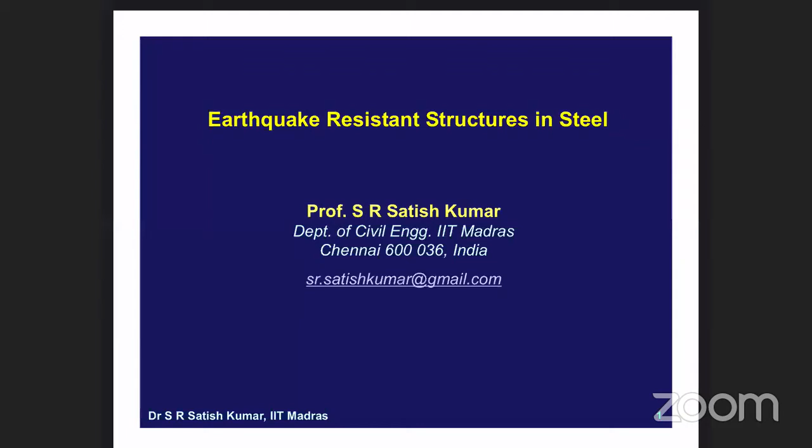Professor Satish Kumar, sir. Now you can start, sir. The presentation is already on the screen. Sir, I think audio is mute. You're not able to hear. I think sir is facing some problem with the iPad. Okay, now we can start, sir. Okay, sir, good morning. Thank you, sir.

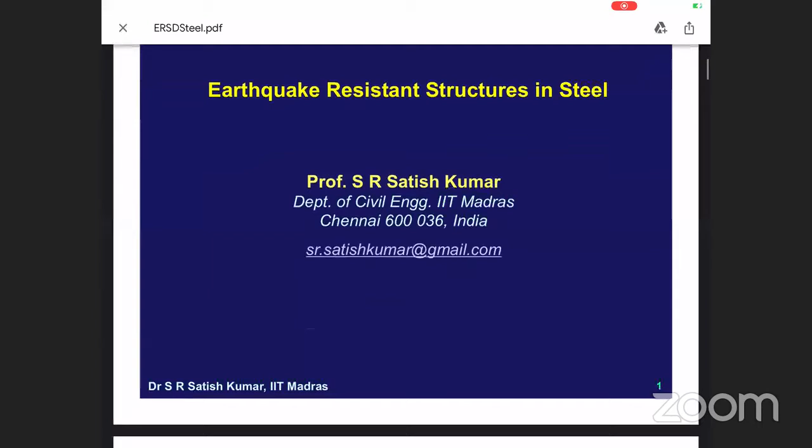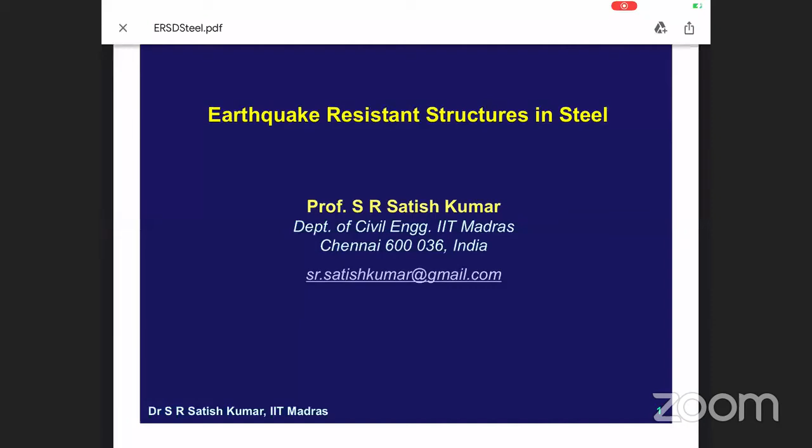So basically, we are going to look at earthquake resistant structures in steel today. I'll be talking about seismic analysis and design as applicable to design of steel structures. Some of these issues and topics have already been covered by other speakers, but I'll be touching upon the specific aspects related to steel. Then I'll look at design and detailing for earthquake loads as given in the provisions of IS 800 Section 12, which we can call the code for design and detailing of steel structures for earthquake loads. And then I'll give a quick overview of some special systems which are quite common in other countries, but have yet to take off in our country.

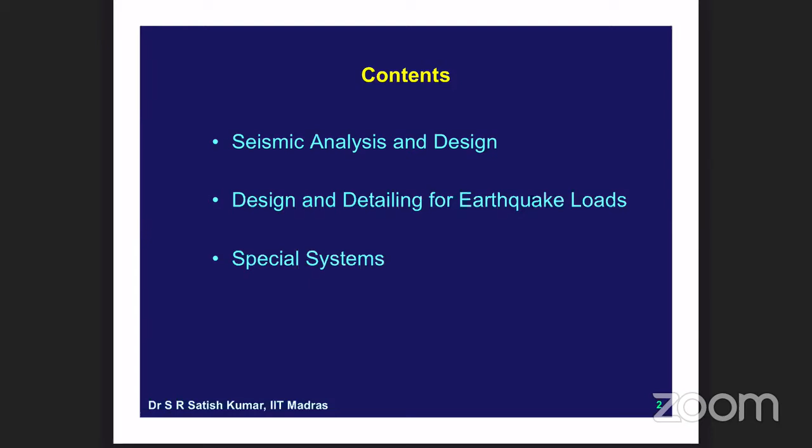So with that background, I'll go to the design philosophy. A variety of issues have been discussed about seismic design, like performance-based design having multiple performance objectives. But the basic core of seismic design is what is known as a dual strategy. There are only two performance objectives. One is to ensure elastic behavior under a moderate earthquake, and the other is to prevent collapse under a severe earthquake. As of now, we are not able to clearly meet even these objectives due to the various uncertainties in the demand and supply, both sides of the spectrum. This itself is a very big issue, and I'll explain how we try to do this. Basically, we estimate based on the probability of occurrence, etc., which Professor Raghukanth covered yesterday.

We estimate the design seismic load. That could be estimated as a ground motion, then converted into a response spectrum, from which we pick up the base shear and the distribution of base shear over the height using principles of structural dynamics. Based on these loads, we model the structure in software, apply these loads, and do what is called an elastic analysis, ensuring that the stresses don't go beyond the yield limit. So that is one level of analysis.

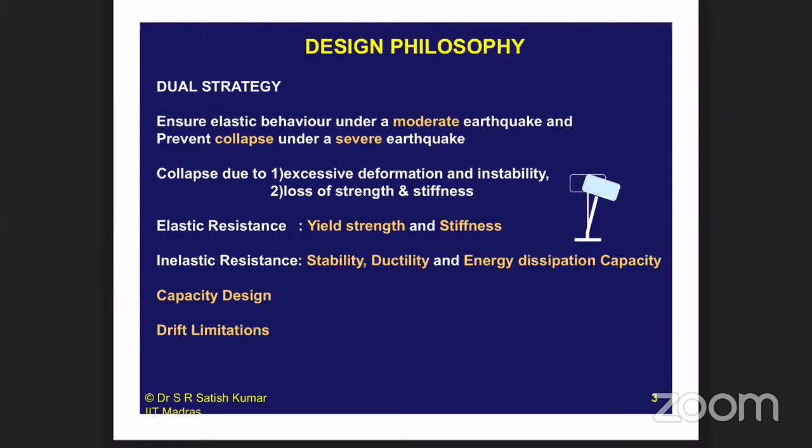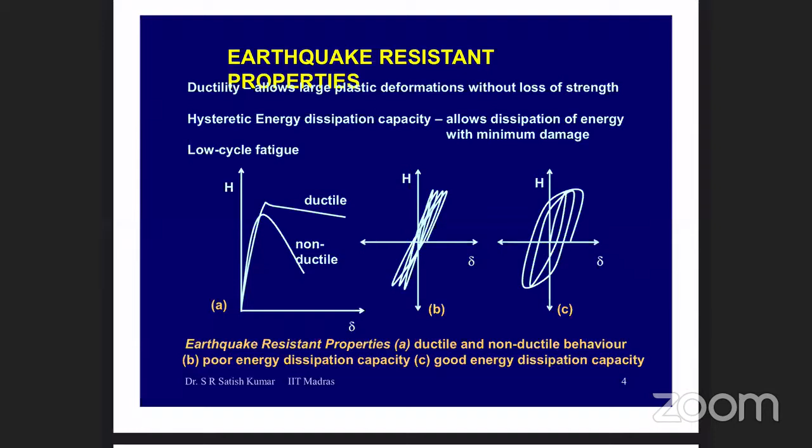We do have some drift limitations in the codes, to satisfy which we need to ensure adequate stiffness so that we are able to control the drift. These drift limitations help us control non-structural damage. Regarding the inelastic earthquake resistant properties, these have already been explained. Ductility is a property that allows large plastic deformations without significant loss of strength. There might be some loss of strength, but it should not be very significant. Similarly, hysteretic energy dissipation capacity allows energy dissipation without loss of strength and stiffness. These are the two properties that help us.

So what are the advantages of steel as a material for earthquake resistance or as a material of construction? By nature it is very ductile and consequently gives robust structures. That could be redistribution of stresses or redistribution of moments. Whenever one section of a steel member reaches its full plastic moment, it develops what is called a plastic hinge, and it continues to rotate until other sections of the member also reach their limit. That is redistribution of moments, and that gives robustness. Robustness is defined as the ability to survive or avoid collapse even under some degree of damage at certain locations.

The other advantage we have with steel is that it can withstand reversal of stresses. The stresses that it is able to take in tension and compression, that is, the stress-strain curve for steel in these two directions, are almost the same, unlike concrete, which is pretty much weak in tension, right?

So in fact, you should remember that in reinforced concrete also we do use lots of steel, right? So to achieve ductility and energy dissipation, etc. So that is another major advantage. So I don't need to probably design a section which has been designed for, let's say, sagging bending moment. It will be able to take considerable amount of hogging bending moment, or a member like a column which is under compression can take considerable amount of tension, right, without having any serious issues. So that is another advantage. It can dissipate considerable amount of energy under cyclic loading. So that gives enormous robustness to the structure.

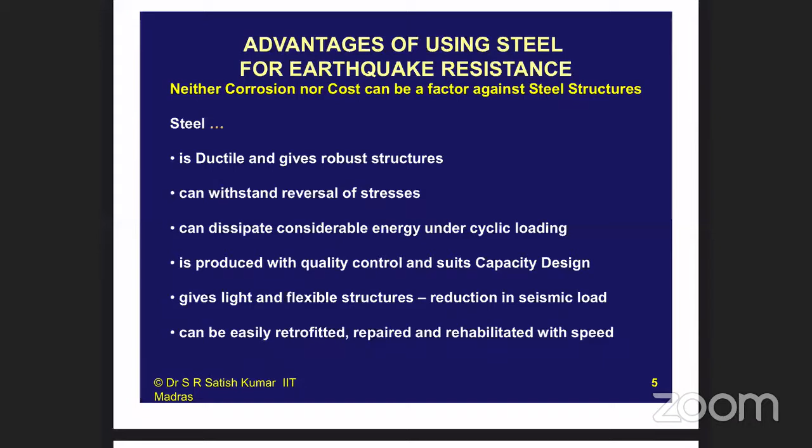So, steel also gives an advantage that it can be easily retrofitted, repaired, and rehabilitated with speed after an earthquake. If you find that a particular structure is deficient, you can always retrofit the structure to give it larger earthquake resistance, right? So those are the other advantages. On the whole, we find that steel structures do perform well.

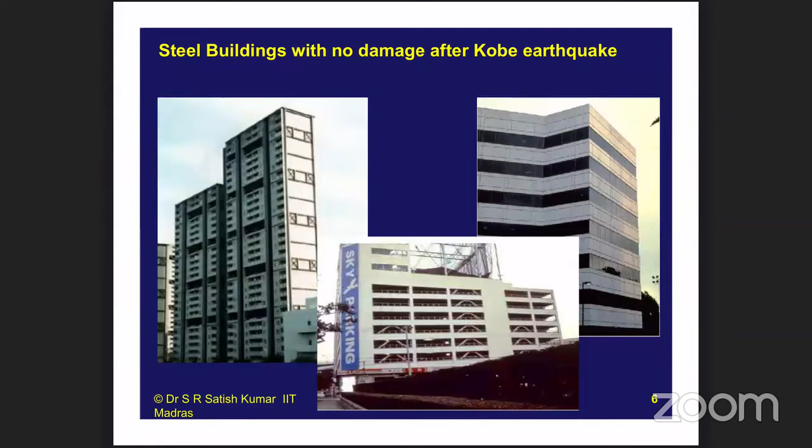These are photographs from the Kobe earthquake, showing a variety of structures with a variety of configurations. For example, the one on the left is a braced frame structure, which is very narrow, I would say. That is, its width is very low and it is very tall. The one below is a parking structure with inverted V-braced frames, and the one on the right is a moment frame. All these structures experienced an earthquake with a peak ground acceleration close to gravity G, and they had almost no damage. This is generally the case, but there are some cases where we have observed damage, and we are just trying to make sure those things do not occur again.

Okay, so now we are going to look at how we ensure adequate ductility and energy dissipation at various levels. We start at the material level, and we know that steel is a ductile material in general. But of course, as you increase the strength of steel, from 250 MPa to 500 MPa steel, it becomes a little more brittle. Codes like IS 1893 specify the kind of materials you can use in steel structural construction, and they specify two particular properties. One is the elongation percentage. That is, after you do a tensile test on a coupon and the coupon breaks, you check how much it has elongated. This elongation has to be at least 15–20% as per the material requirements. If you have that, then you can say your material is ductile.

The other important property, because earthquake loads are generally impact type loads, is this: when a material experiences a sudden impact, sometimes a ductile material breaks in a brittle manner. To guard against that, we do what is called an impact test, the Charpy V-notch test, which is the CVN that you see here. We ensure that the steel has adequate energy dissipation capacity, around 21 to 26 joules. If it has that, then again we can call it ductile. These two properties are related, in the sense that the more energy you dissipate or the more you work harden, the steel ductility would reduce. So we need to make sure that the steel has both elongation ductility as well as energy dissipation capacity.

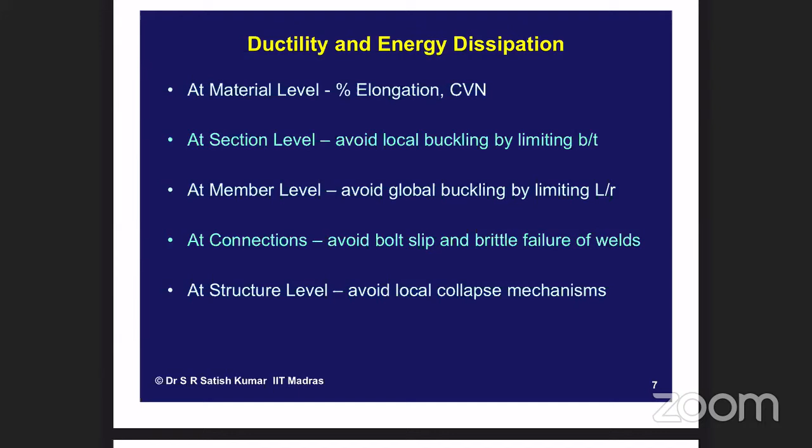So as a structure as a whole, we avoid basically what is known as the local collapse mechanism, which is like formation of hinges at the ends of a column in a particular story. So I'll show a slide for that. I'll just quickly go through what we have just looked at. That is, what is the percentage elongation for steel at the material level.

So here you see the bottom curve is, as you look, a stress strain curve for mild steel. And as you load, you reach the yield stress, you have a large yield plateau. There is some strain hardening, but then eventually it fails at a large strain value, right? So this yield plateau enables your material to be very ductile.

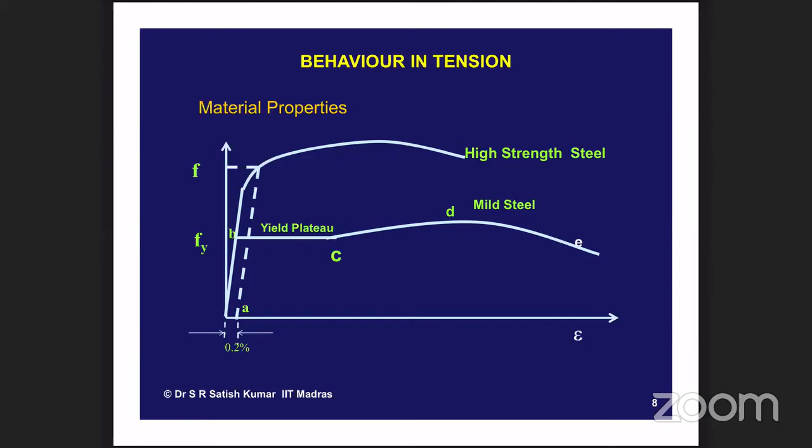Okay. Similarly, as I said, as you increase the strength, normally we wouldn't want to increase the strength of steel by work hardening or adding carbon, because that reduces the ductility and elongation. So generally how it is done, as all of you know in terms of reinforcement, is a thermomechanical treatment. So nowadays we get what are called TMT rebars for reinforcement. A similar treatment can be done for steel, and we can ensure higher strength and to some extent ductility. And we can also get ductility by adding some other microalloys like chromium, manganese, etc. So this also gives you higher strength without compromising on ductility.

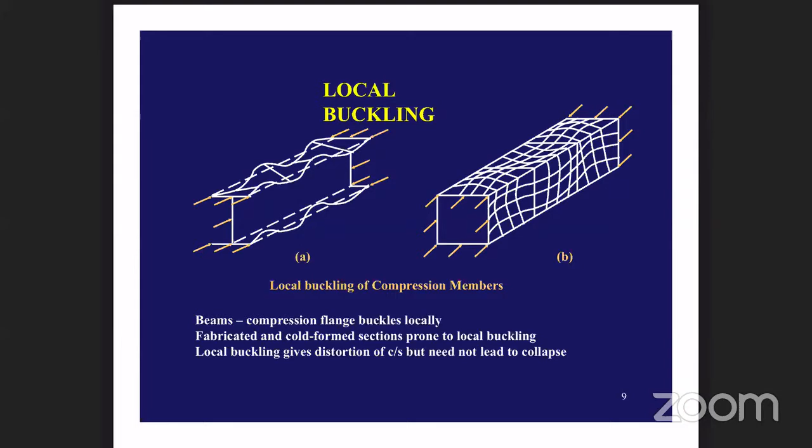Okay, and this slide shows exactly how local buckling in an I section or a box section happens. As you go on compressing, since it's a buckling, it will happen only when the stresses are compressive. And if you actually compress an I section with very thin flanges, you can see how the flanges become wavy, and that becomes local buckling, right? So that is how it happens. And the only way we can avoid this is by limiting the B by T values. Okay, so width to thickness ratio values.

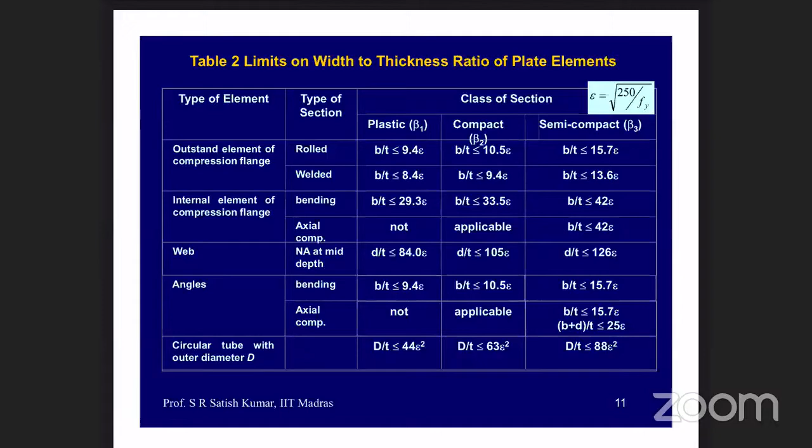Okay, so how to do this? It's very simple. You just calculate half the width of your flange divided by the thickness, and your B by T should be less than, for example, if it's a rolled section as given in the first row, 9.4 epsilon, where epsilon is defined again in this corner. So that is how we avoid local buckling and consequently ensure that the plastic hinges can rotate. And if the plastic hinges can rotate, then we can form multiple plastic hinges in the structure, which eventually leads to what is known as a global ductile collapse mechanism. Okay, so that is what we get.

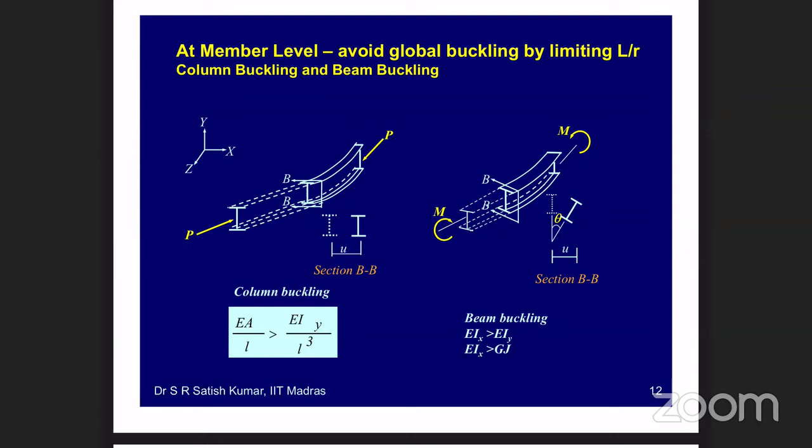And at the member level, both columns and beams do have the risk of having some sort of member buckling. Like in columns, we have flexural buckling or flexural torsional buckling. In beams, we have lateral torsional buckling. So if we are able to avoid these bucklings by adequate lateral support, then we do get a better performance from such elements or members.

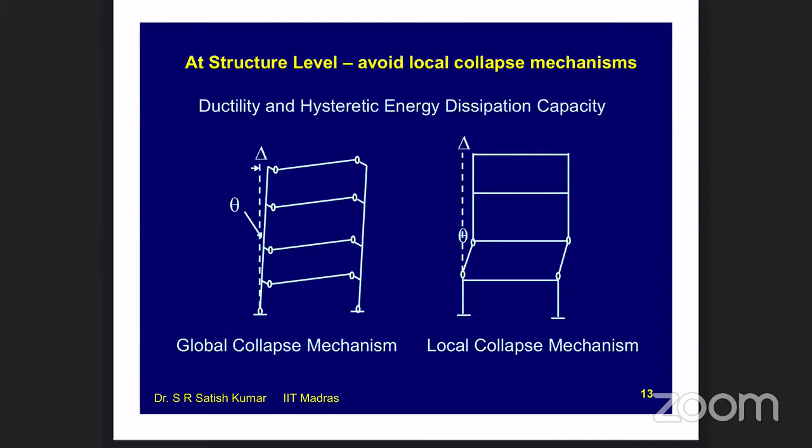So our aim is to basically avoid the local collapse mechanism shown here on the right hand side, where hinges have formed in the columns. And we find that as a consequence, the overall structural ductility is low, whereas the collapse mechanism shown on the left, where hinges form at beam ends, gives you what is known as a global collapse mechanism, which gives more ductility and more energy dissipation capacity. So we would like to form this, and consequently our design and detailing rules are aimed towards achieving this. Okay, so that is what we are going to look at now.

So let's proceed to section 12 of IS 800, where these are the sections as listed. Note that this code was written in 2007, and at that time IS 1893 was giving load combinations, etc., only for plastically designed structures, not for limit state design. So there was some necessity to include some clauses in the beginning, but these are now superseded by IS 1893-2016 as shown in the brackets here.

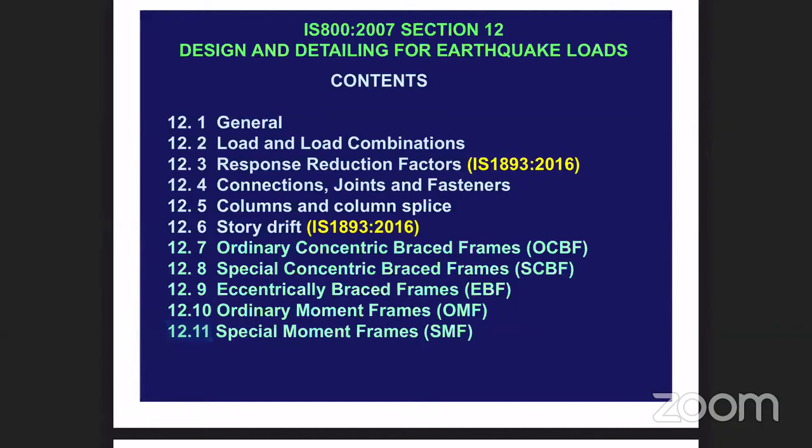So the first, of course, 12.1 is a general introduction to ductile design and detailing, and 4 and 5 talk about connections, columns, etc. And 12.7, 8, 10, 11 are the 4 major sections. 12.9 talks about EBF, which is not covered in the code itself. It just says you refer to specialized literature. But 7, 8, 10, 11 are the main systems which are commonly used in steel. And so those guidelines for such structures are given in the code.

Okay. So just looking at 12.1, it basically says that section 12 is applicable only for the design and detailing for earthquake resisting frames only. I think Dr. Rupen Goswami told you that not all frames in a building need to be designed to take lateral load or earthquake load. So only those frames which are designated to take lateral load have to be designed and detailed as per section 12. The rest of the frames will only take gravity load, and this decoupling of gravity and lateral load resisting systems is particularly easy in steel structures compared to reinforced concrete structures. So it becomes easy to analyze and understand how such a system will behave.

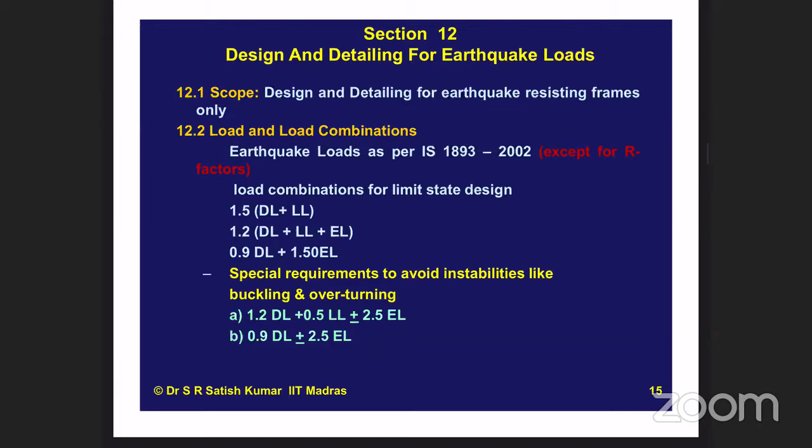Okay, the load combinations are actually as per IS 1893-2016, that is 1.5 DL plus LL or 1.2 DL plus LL plus EL and so on, or 1.5 DL plus EL, etc. The last one, 0.9 DL plus 1.5 EL, is to be used only to check the overturning stability of the structure. Apart from this, there are 2 more special load combinations where we find plus or minus 2.5 EL coming in. These are required to check instabilities like buckling of a column or uprooting of footing, etc. Okay, so these are possibilities. I'll explain with this slide.

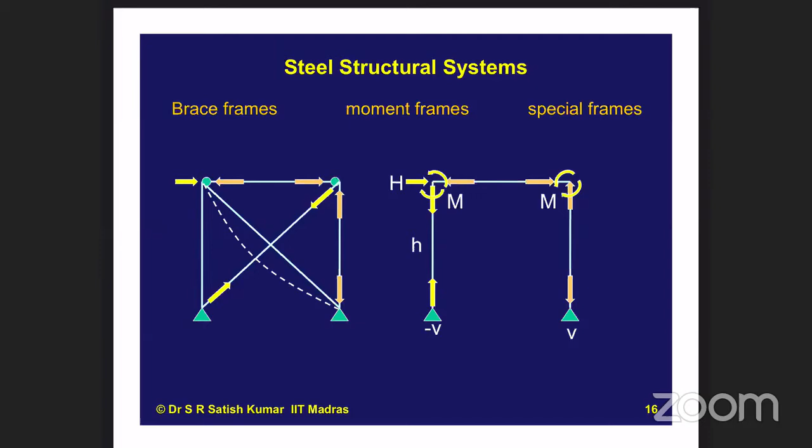So these are the two frames which are commonly used, and depending on how much margin we have in these aspects as well as the ductility aspect, we would classify them as ordinary or special, okay, exactly the same as we do in reinforced concrete. Okay, the third category I will talk about later, towards the end of this chapter. So this basically gives you the clause that ensures or prevents the buckling of the leeward column under the additional axial compression that generates due to a larger seismic force.

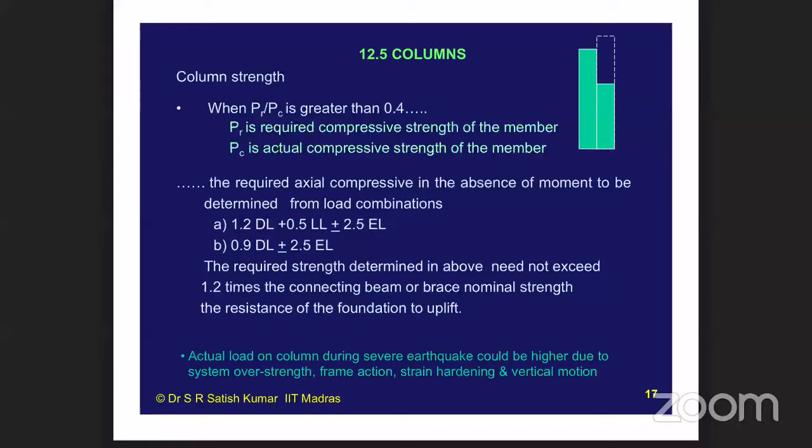So what it says is there's something called the required compressive strength of a member, right? As per your analysis, you come to a value, you conclude that this column requires this much strength. So we provide a strength, and Pc is the actual compressive strength of the member. So normally the actual compressive strength would be greater than the required compressive strength. So that is something which we normally ensure. But when the margin is less, that is, the actual strength is not very much greater than the required, very close to that, that is when Pr by Pc is greater than 0.4, then we need to ensure that the column does not buckle, so that we will not have a brittle mode of collapse. Okay, so that is something which we are trying to do here, by following this clause.

Okay, so general comment on frame classification. As I said, we classify both concentric brace frames and moment frames into ductile and ordinary and special frames. Ordinary frames have limited ductility, and special frames have a fairly large amount of ductility. We don't really calculate how much, but we just classify them based on our design and detailing rules that we have adopted. In high seismic zones and important frames we would like to rely more on ductility and use higher response reduction factors from both economical and safety considerations.

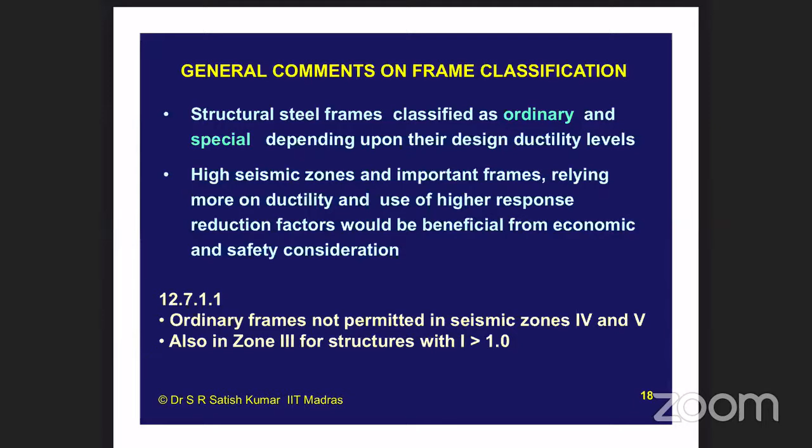So the code generally says, as in IS 13920, ordinary frames are not permitted in seismic zones 4 and 5, and also in zone 3 for structures with importance factor greater than 1. So that is something which we try to do. Now I've just revised these numbers based on 1893-2016. The IS 800 gives the old numbers. So now you need to follow these new numbers.

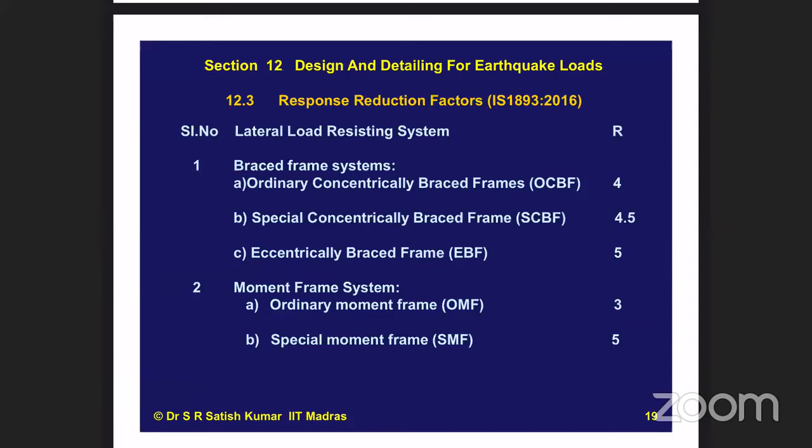So as per the new numbers, we find that ordinary concentric brace frames, in short, are called OCBFs. They have an R factor of 4, and SCBF have an R factor of 4.5, and OMF have an R factor of 3, and SMF have an R factor of 5. Okay, so that is how the ductility translates into a larger reduction factor, and consequently more economical design and more assured safety compared to an ordinary frame.

Now, connections are very important because there's a lot of uncertainty in understanding the behavior of connections. Even though we do some calculations and design, the connections may not exactly behave as per our calculation. So people have tested a variety of connections, and what they have found is it's better to use what are called high strength friction grip bolts. Okay, and these should be fully tensioned. So the code says that in earthquake resistant frames, you should use fully tensioned HSFG bolts in standard holes.

And as far as welding is concerned, they want you to use full penetration butt weld. Okay, because fillet welds do have a tendency to crack. Okay, I'll show you some cracks later on in steel structures. They do develop cracks in their welds. Okay, this is because welding introduces both residual stresses and stress concentrations and things like that. So it has a tendency to crack under cyclic loads.

And it also says that bolted joints shall not be designed to share load in combination with welds on the same frame surface for a particular, what I should say, stress resultant. So, I mean, we can never avoid bolting and welding being used together. Of course, you can avoid it if you use fully welded connections, but when you use partial welding, let's say you weld an end plate to a beam and then you connect this beam to a column with bolts, because in steel, site erection becomes an important issue. So we would always try to facilitate that by using some bolted connections.

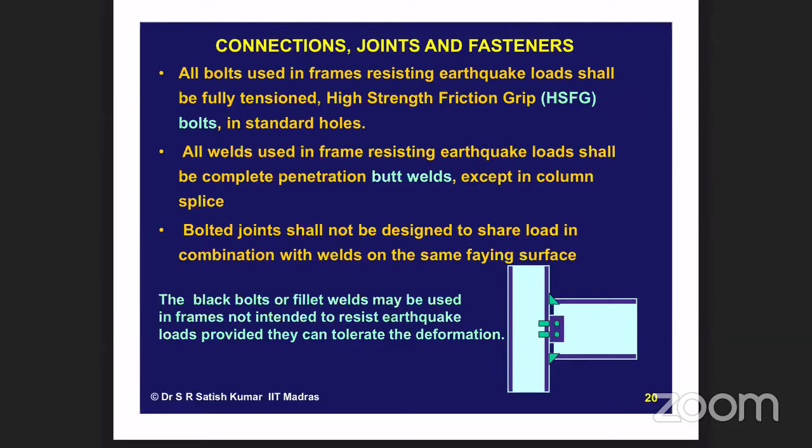So this is allowed, but then I can't transfer like 50% of the moment by bolts and 50% by welds, or 50% of the shear by bolts and 50% by welds. That kind of thing is not allowed. Okay, so that is regarding connections.

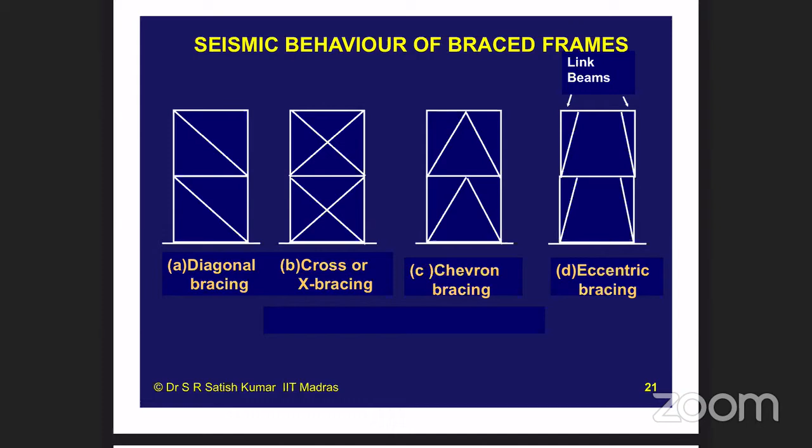Okay, so the chevron bracing has the advantage that it partially takes gravity load also. So it has some special design and detailing rules. And then the last one is where I find that my brace is not meeting the other brace, or brace, beam and column are not meeting at a single point, right? So this is called an eccentric bracing. I'll show you how eccentric bracing behaves and how it is to be designed later on.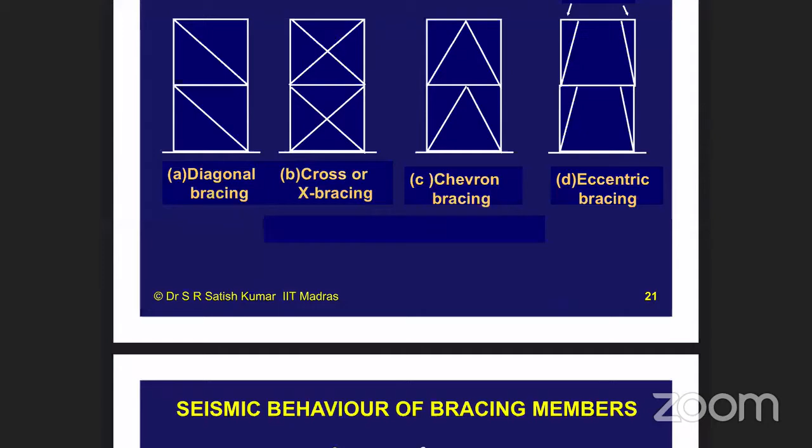So we are going to look at only diagonal and cross bracing now. Basically, if you put diagonal bracing in two separate panels, sloping in two directions, it is equivalent to a cross braced frame. Okay, so if you take a cross braced frame, and as I explained with the previous sketch, when I apply a load, one diagonal goes in compression, the other goes in tension.

So in the tension side, it always manages to reach the yield strength, but in the compression side, as it buckles more and more, due to the buckled shape, it buckles at lesser and lesser load, right? So that is what happens. It never straightens up completely. So a diagonal brace which is subjected to cyclic compression and tension may not perform very well.

Okay, so that is why we use braces sloping in both directions, and they are generally used in pairs. And also we would like to limit the slenderness of the brace to ensure that the buckling does not seriously impair the energy dissipation capacity. So we limit the slenderness of the brace, and to avoid local buckling, we also prefer solid sections or plastic sections, right? So those are the detailing rules for a typical brace.

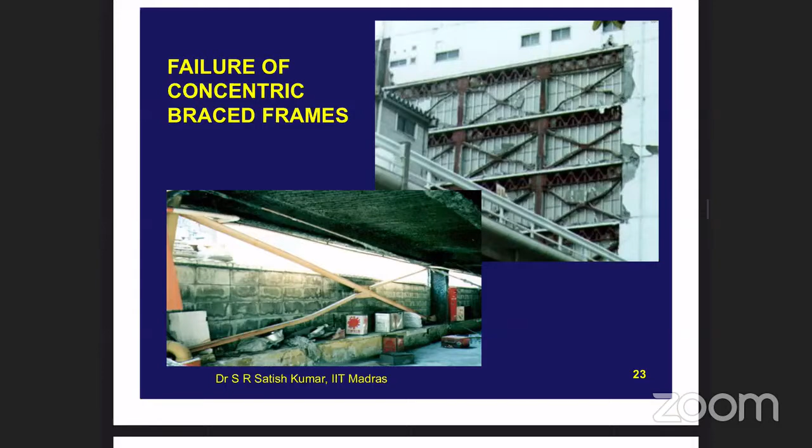Now these photos are basically from the Kobe earthquake. They show how the braces have performed during the earthquake. They have basically buckled in one direction, you can see, and the other direction looks more or less straight. But actually, that direction also they have buckled, because the earthquake load has been cyclic. We are not able to sometimes see it, but basically the braces have yielded and buckled, and then they have dissipated the energy and they have prevented the structure from total collapse, right? So that is what we wanted, and they have done their job. Okay, so this is what we are expecting when we do proper detailing of a braced frame.

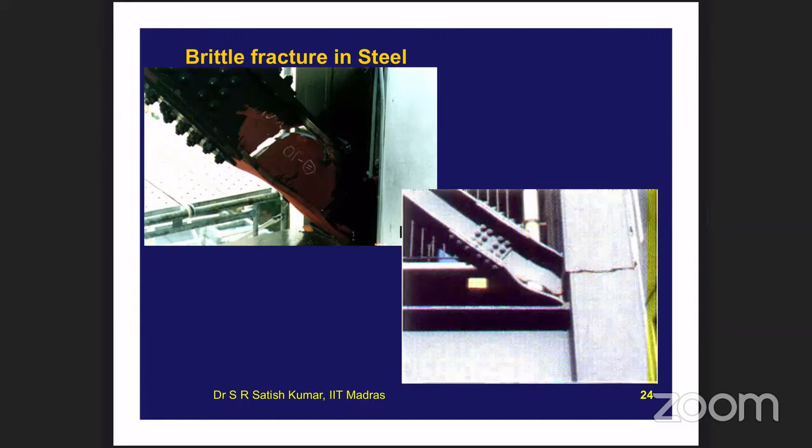So with that understanding, we'll see what the code is asking us to do. 12.7 talks about OCBF. It says these provisions are only for diagonal and X-braced frames. V and inverted V are to be designed as per specialist literature, because they are not currently commonly used. Normally they are used in pipe racks in some industrial structures, but apart from that, for commercial or industrial buildings, they are not commonly used. K-braced frames are not permitted.

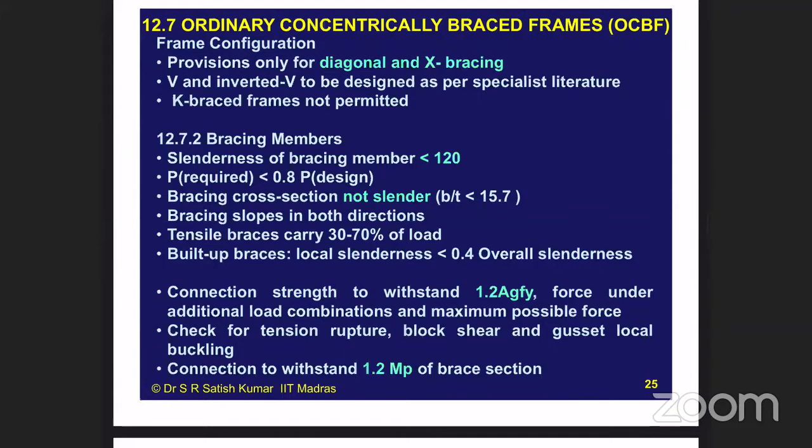And then regarding the detailing of bracing members, basically the code says that the slenderness of the bracing member is to be limited to 120. This is KL by r of the brace member. And the P required should be close to the P design. That is, in other words, P design should not be very much larger than the required value. You know why? Because this brace is supposed to get yielded and damaged and protect the rest of the structure. So if you over-design a brace, that is, you may require, let's say, a brace capacity of 120 kilonewton, and you provide a brace which can take 250, right?

So then what will happen is your brace will not yield until the 250 force is coming. In the meantime, the column may buckle, or the beam may laterally buckle, or something will happen, and the frame may fail in a brittle manner. So since a brace is a fuse, we should not have a fuse which is over strong, right? Stronger than the rest of the structure. So we would like to limit the brace capacity very close to what is required. We want the brace to fail. Okay, so that is what this is expecting. And the bracing cross section should not be slender.

So plastic or even many of your bigger angles, like let's say 100 by 100 by 6, would classify as a semi-compact section, and that is acceptable. As B by T is less than 15.7, but a slender section is not acceptable. Okay. And then bracing slopes in both directions.

Okay. Similarly, the connection should withstand 1.2 times MP of the brace. Again, this is not very difficult because these sections being angles or rods or very small sections, normally their MP would be very small. So providing a connection which can take 20% more than that is not expensive. Okay. So that is how it is to be done.

Next, we talk of the same brace frame. Instead of ordinary, we want to make it special. That means we want to make it even more ductile. So the provisions are pretty much similar, only for some of the green numbers you can see. Slenderness of the bracing member less than 160.

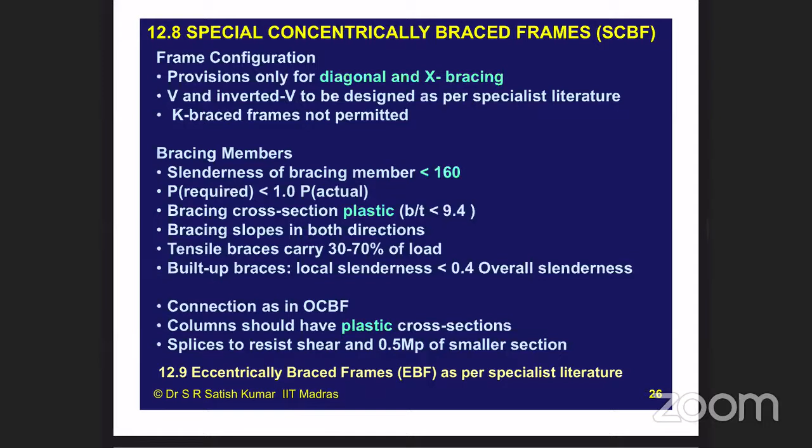Bracing cross section in this case is expected to be plastic, because we are expecting the brace to perform even after global buckling. So B by T should be less than 9.4. So it will develop a plastic hinge at midpoint, and it might probably bend at that point rather than buckle. And columns should have plastic cross section. So except for this, the rest of the provisions are all the same. Okay. And 12.9 is just one line. It says eccentric brace frames as per specialist literature.

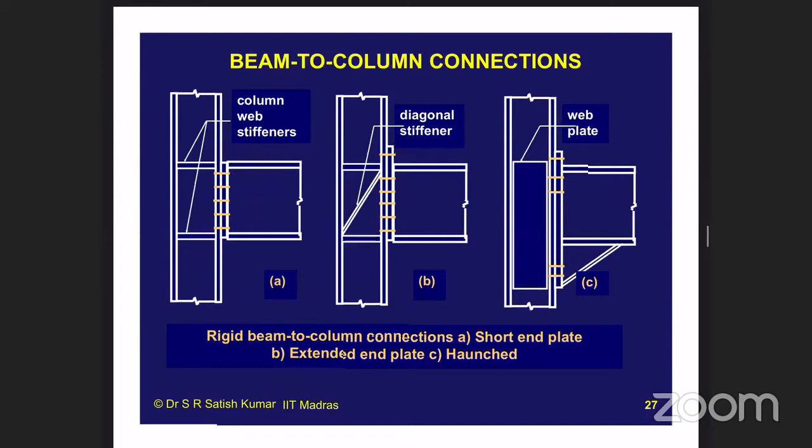Then coming to the moment frames. So in moment frames, as I told you, we need to transfer more than the full plastic moment capacity from the beam to the column. So there are a variety of connections which have been developed, and this leftmost one shows what is known as an end plate connection. So you weld an end plate to the beam and then bolt it to the column.

So the yellow lines are the bolts. So it shows you the bolted end plate connection. And you can see there are also column web stiffeners which are shown, because column flanges tend to buckle out of their plane, right, when they are pushed or pulled by the beam flanges. So we need to provide column web stiffeners at these locations.

And if the column web is very thin, then we may even need to provide a diagonal stiffener as shown in the middle figure. Or sometimes instead of this, we provide what is called an additional web plate or a doubler plate. So that is shown in figure C. Okay, so all three in this figure are end plate connections. There are other possible connections. I'll show you some of them later on. But this is how the beams are given rigid end connections, which can take more than the MP, possibly 20% more than the MP of the beam section.

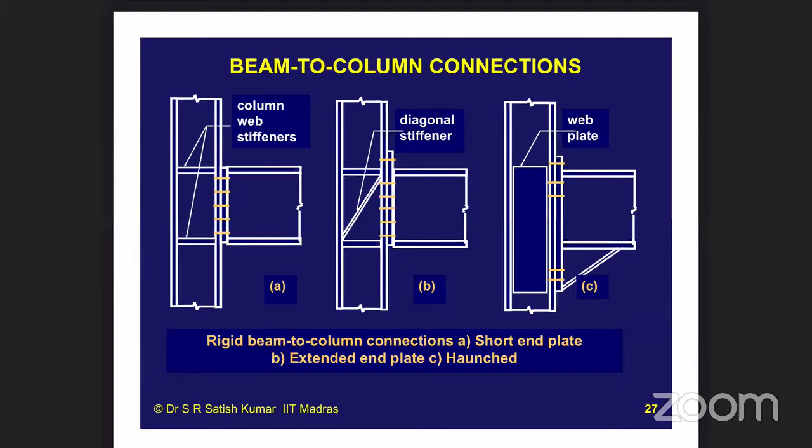Okay. So the second figure, the middle figure, shows an extended end plate, where the end plate has been extended upwards and one more bolt has been put. This becomes even more efficient. And if you have a very large moment to transfer, you may want to extend the end plate downwards also, and sometimes we provide a haunch. So this is a haunched extended end plate connection. So these are possible connections which can be used.

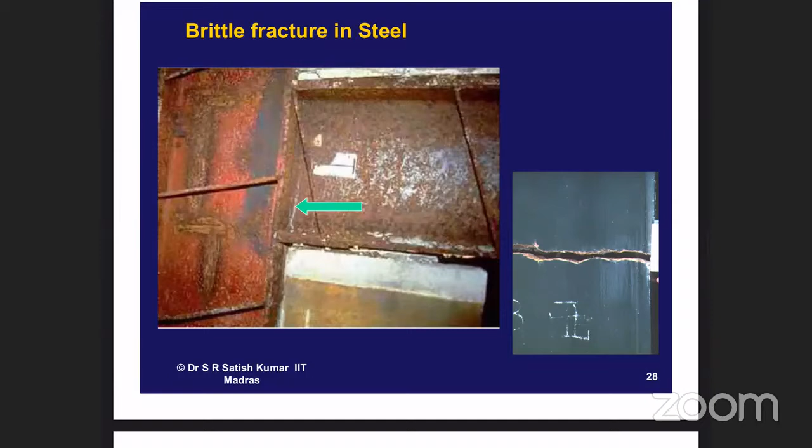So we are not allowing fillet welds anymore. We are expecting butt welds to be done for the beam flanges, etc. Okay. And the right picture shows a crack in a column in the Kobe earthquake.

Right? So these possibilities are always there. So coming to these ordinary moment frames, basically rigid moment connections have to withstand 1.2 times the full plastic moment capacity Mp of the beam, or the maximum moment that can be delivered, whichever is less. The second part of the sentence I'll explain later on.

Then rigid connections have to withstand a shear of 1.5 times dead load plus 1.5 live load, whatever shear comes due to this. So I've shown this 1.5 DL plus 1.5 LL as a yellow line on the beam in the bottom figure. And due to this load, there will be a V generated at both ends of the beam. These two V's will be upwards.

Okay. And due to earthquake load, when the beam develops plastic hinges at both ends, we have 1.2 times Mp at both ends, which are shown as the curved arrows in the figure. Notice that both are anti-clockwise, right? So they try to give a rigid body motion to the beam in the anti-clockwise direction. This is counteracted by additional shears set up at the connections. So these are VM, where M stands for the shear generated due to the moment.

Okay. So on the left side, we have V plus VM, and on the right side, we have V minus VM. And we should remember that earthquake loading can reverse. So the right side could have V plus VM and the left side could have V minus VM. So basically, we are saying that the connection should be capable of taking V plus VM, right? So that is what we are expecting. This is also explained in terms of IS 13920 by, I think, Dr. Rupen Goswami in the previous lecture. So it is similar to that.

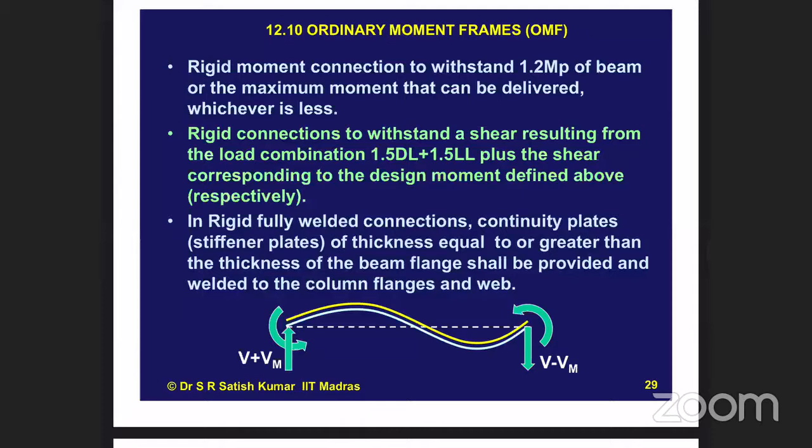And in rigid fully welded connections, as I showed, continuity plates should be provided in the columns to avoid the column flanges bending or buckling outwards.

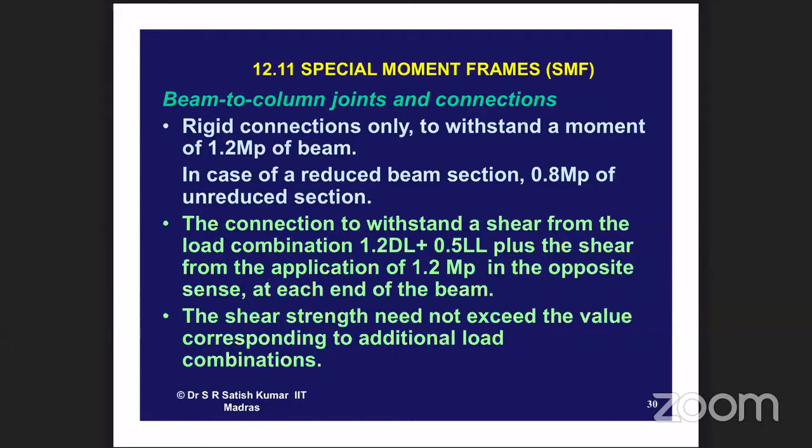Okay. Then coming to additional requirements for special moment frames, again, the first clause is the same: rigid connections have to withstand a moment of 1.2 times Mp of the beam, and 0.8 times Mp in the case of reduced beam sections. Then connections have to withstand the same thing, that is 1.2 DL plus 0.5 LL, and then 1.2 times Mp in the opposite direction applied at the beam ends. Shear strength need not exceed the value corresponding to the additional load combinations.

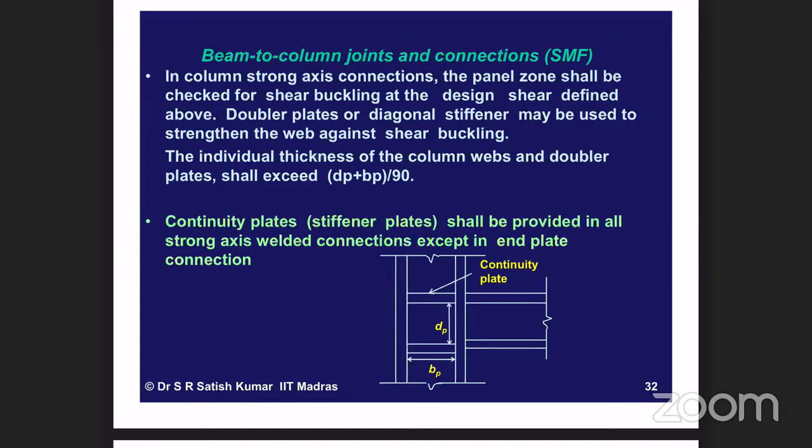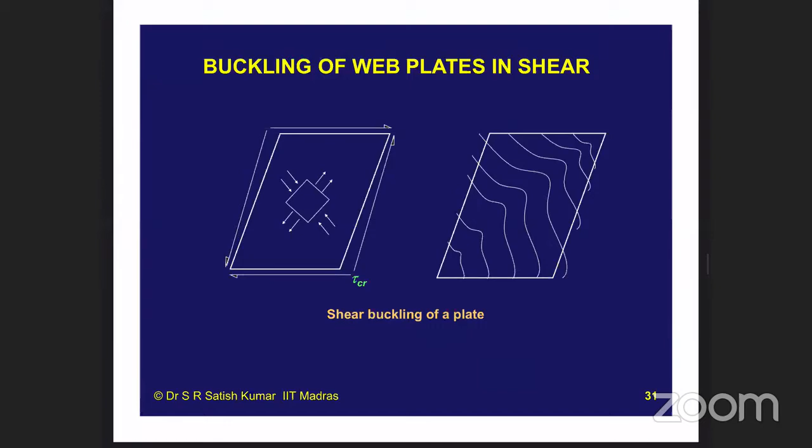Okay. Now, the panel zone that we have, that is this zone between the beam and the column, is called the panel zone of width BP and depth DP. This goes under extreme shear, right? So the column web plate experiences extreme shear. Consequently, there is a risk of this web plate yielding in shear or buckling in shear. So even if it buckles in shear, it's not a serious problem. When the shear reverses, it kind of straightens up and then tries to yield in the opposite direction. So shear buckling is a well-known energy dissipating phenomenon. But to control that and have adequate energy dissipation capacity, we may want to check that.

Okay. So the code says that if dP plus BP divided by 90 exceeds the thickness of the web plate, then we need to provide a diagonal stiffener or additional doubler plate. Okay. So that is how we make sure that the panel zone yielding ensures a ductile behavior in a special moment frame. And then, of course, beam and column sections shall be plastic or compact. At potential plastic hinges, they have to be necessarily plastic sections. That is, you are limiting the b by t values.

And the next one, that is summation of MpC greater than 1.2 summation of MpB, is basically that the column top and bottom column moment capacity at an internal joint should be more than 1.2 times the left and right side beam capacity. This depends on whether you're talking about an internal joint or an exterior joint, or I mean, what I should say, an intermediate floor joint or the top floor joint, etc. In the case of the topmost floor, you don't need to follow this. You can develop plastic hinges in the top joint of the column, that is allowed. But at other locations, we would like to have hinges forming in the beams, and this translates into what is commonly known as the strong column weak beam kind of design.

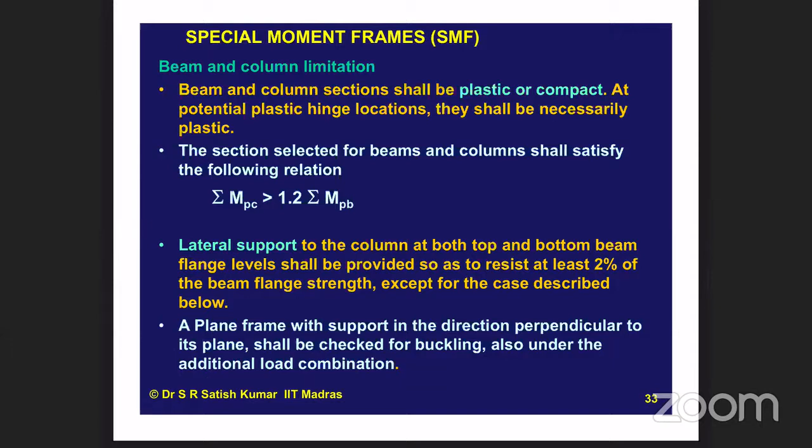So to avoid this, we should always ensure that lateral support is provided at several locations, column top, bottom, etc., and beam ends, so that such things would not happen. Okay, so the plane frame will move only in its own plane. So that is something which we want to ensure.

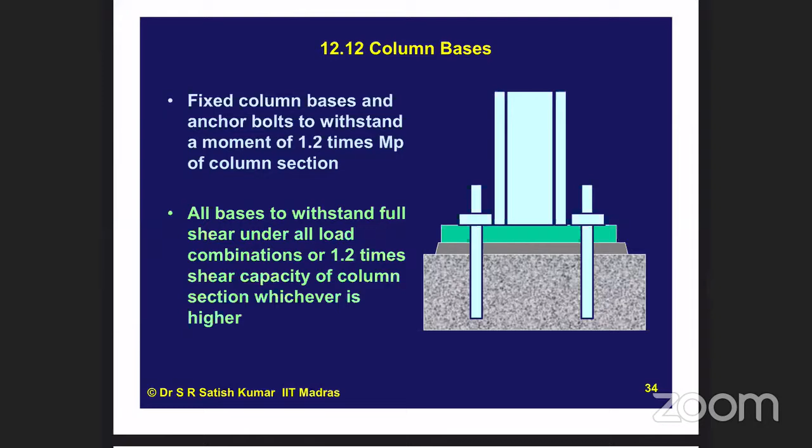And so consequently, you have to check that the anchor bolt will not pull out, and the nut will not thread strip on the anchor bolt. If the nut slips on the thread, it's called thread stripping, or the base plate may bend and break or whatever. So all this we need to ensure. On the whole, sometimes this entire column may have upward tension plus a moment, or maybe without a moment, so it must not pull out, right? So that also we need to ensure. So pull out capacity, and then moment capacity and shear capacity, all three have to be ensured for the column base to perform adequately.

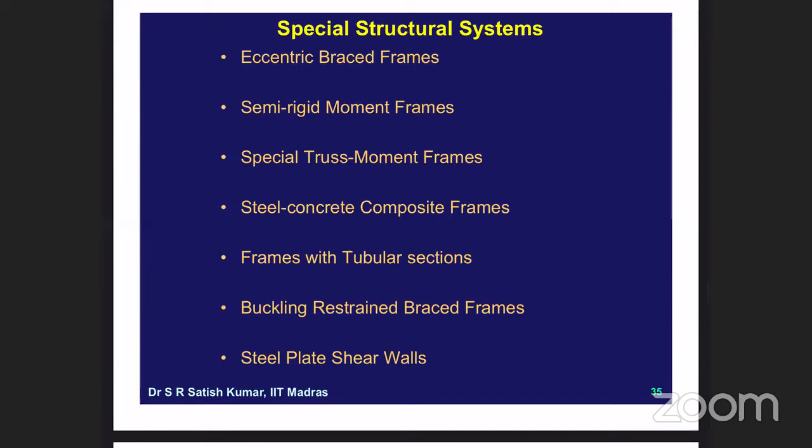Coming to the last part of the presentation, I'll just quickly touch upon some of the special structural systems which are listed here. So we'll just go through them one by one. I don't want to read them now.

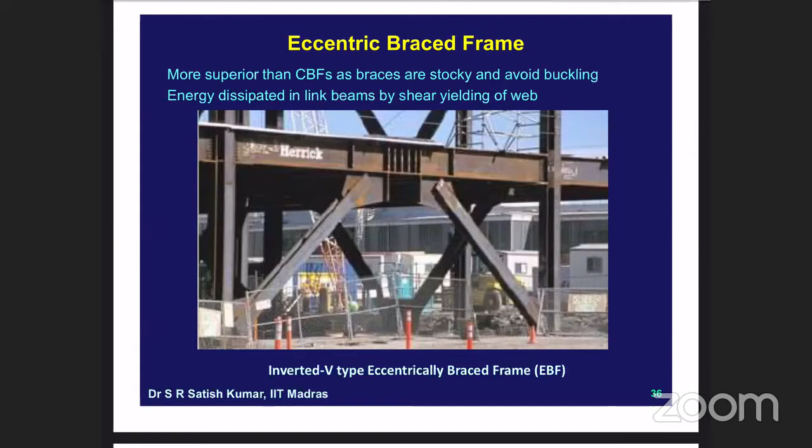And what will happen is when you push this frame in the lateral direction, there will be an enormous shear developed between the section on the left and the section on the right. So to safely transmit the shear without shear buckling of the beam web, additional stiffeners are provided. And by this process, we are able to dissipate a huge amount of energy at that location. And notice that your beam also has two braces supporting it in the middle. So the beam span has also reduced to some extent, and consequently the beam failure is avoided. And the only thing that has to now fail is this link beam between the two gusseted sections, and that is dissipating energy by shear. Okay, so this is a common system which can be used, and such frames are known to perform very nicely during high earthquakes.

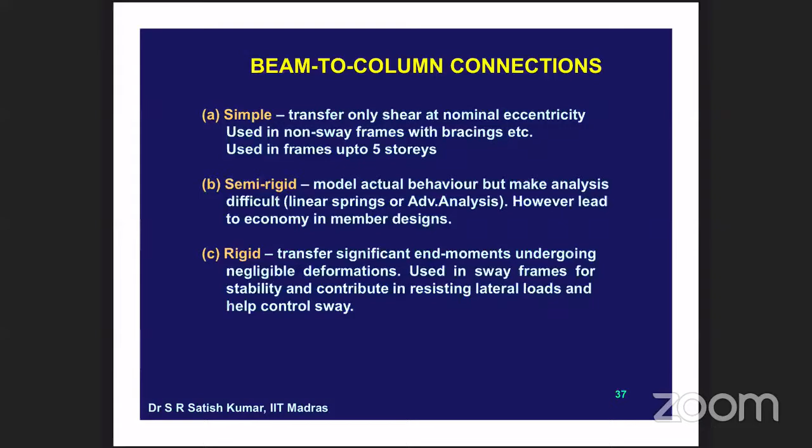Then we'll proceed to what are called semi-rigid moment frames. So we know that a connection can be simple, wherein it transfers only shear, or a connection can be rigid, where it transfers the full moment that comes on it. But there could be connections which deform and transmit only partial moment, and these connections are called semi-rigid connections.

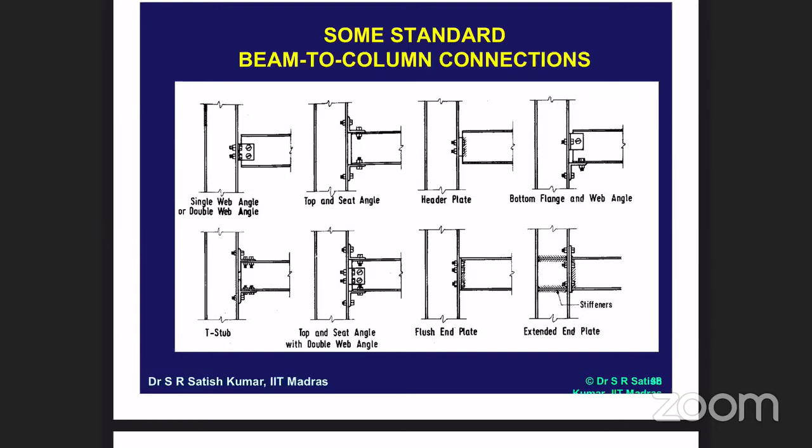Some of the connections which we see here, in the top left, we start with what are called simple connections, like a single web angle connection is a simple connection, a header plate is a simple connection. And as we go on towards the right, the connection starts taking more and more bending moment. Okay, and when you come to the extended end plate or flush end plate, it takes the full bending moment that the beam can transmit to it. So in between these, we have what are called semi-rigid connections. So the moment rotation curves look like this. So we classify up to the header plate connection as a simple connection, and the extended and flush end plate connections are classified as rigid connections.

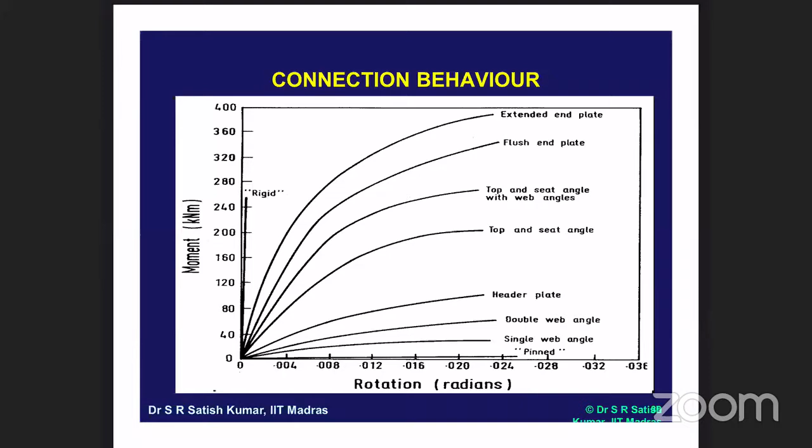The top seat angle and such connections are classified as semi-rigid connections. There are a variety of other semi-rigid connections also. So these connections rotate as moments are applied, but they do take some amount of moment.

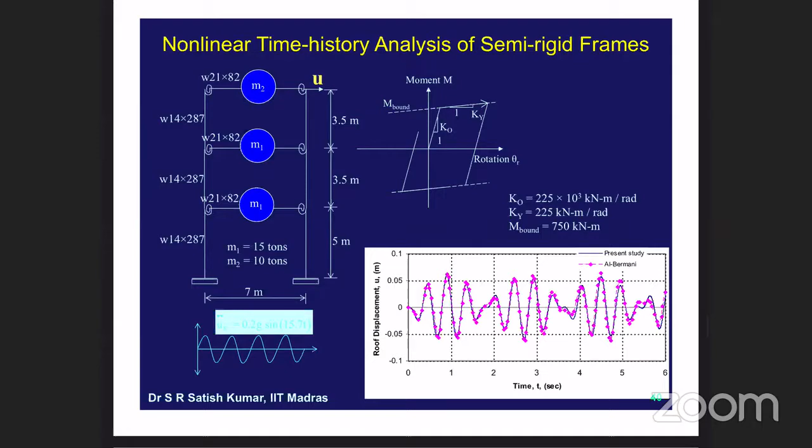A lot of work has been done to understand the dynamic behavior of such frames, and this shows one such frame which has been analyzed, and this is how the response of the semi-rigid frame comes. But interestingly, it was found that these frames have a larger time period. They are more flexible than rigid frames, and consequently they attract less seismic loads, and the fear that they might have larger drifts... Of course, they do have larger drifts than rigid moment connections, but those drifts under seismic loading are not as large, and they can be used to resist moderate levels of earthquake shaking.

Okay, so that is something which is very interesting, particularly in our country, because we don't have very high seismic zones everywhere, right? We have zone 2 and 3 covering most of our country. So in such places, we could go for semi-rigid connections. And the important thing is we need to model the actual behavior of such connections in the structural analysis model.

And so they are permitted, and the minimum strength moment capacity they are expected to have is 50% of the beam full plastic moment capacity, and this has to be achieved within a rotation of 0.01 radians. So these are the requirements as per IS 800 section 12, and the stiffness and strength of semi-rigid connection shall be accounted for in the analysis and design. The overall stability of the frame due to the story drift that we have, we could add to P-delta effects. So all these need to be considered in the analysis, and the safety and stability to be ensured.

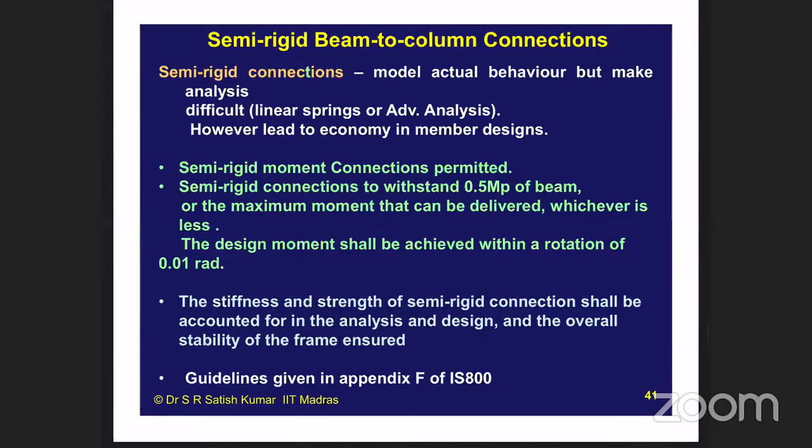Guidelines for some of these moment rotation characteristics of these connections are given in Appendix F of IS 800. Those are only what I should call monotonic curves, but cyclic curves are not yet commonly used, so they need not be used in the analysis currently. But of course, a lot of literature is available on the cyclic behavior of such connections also.

Then there is another type of frame which is called a truss moment frame, wherein we do give simple connections to the top and bottom chord of a truss. But notice that as shown by the two red arrows, they form a couple, right? So the truss develops end moments, and consequently this becomes like a moment frame. As a moment frame, I already told you that there would be some additional shear generated in the columns. So these two shears form a shear force in the beam, and this shear force in the beam is used

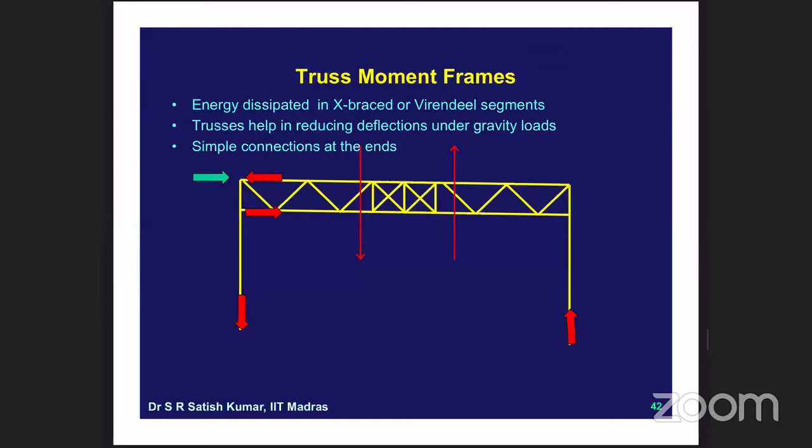typically at the midspan of the beam to be dissipated by some shear yielding or shear dissipating element, right? It could be a brace section like a truss, or it could be a plate or whatever. So whatever we use, by that mechanism we are able to dissipate the energy by shear yielding at midspan of the beam. Okay, so these are called truss moment frames, and these are economical because you don't have to provide the moment connections that you would normally provide in a rigid moment frame, right? So that gives them economy.

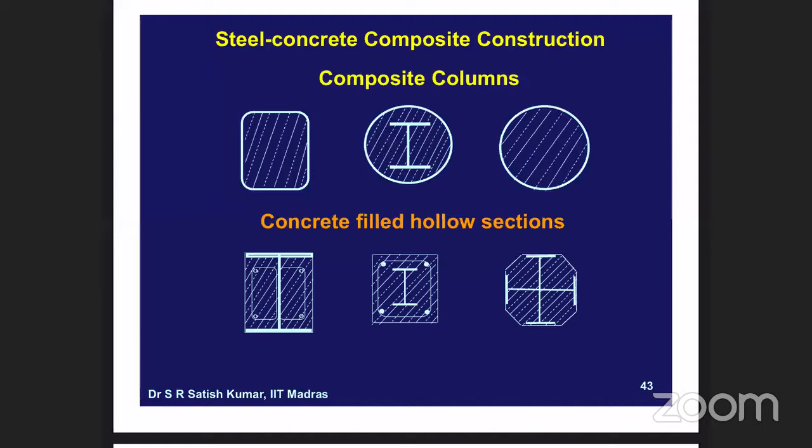Then there is an entire class of structures where we use steel as well as concrete, and we call them steel concrete composite construction. So here there are some column sections shown. The upper ones are called concrete filled tubes or CFTs. The lower ones are concrete encased sections. All these types of cross sections have been exhaustively tested for their behavior under cyclic loading, and they are found to be fairly advantageous.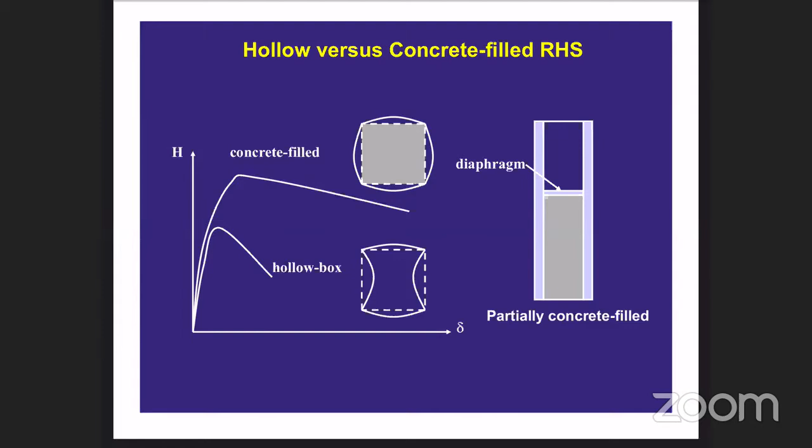So this left hand side shows the lateral load deformation diagram of a concrete filled tube. We find that normally if it's a hollow tube, the flanges will buckle inwards, but once we fill concrete, they can't buckle inward locally, so they have to buckle outwards, and consequently the steel tube also gives more ductility and energy dissipation capacity. The concrete, on the other hand, is also encased, so it has full confinement, so it has additional strength and energy dissipation capacity.

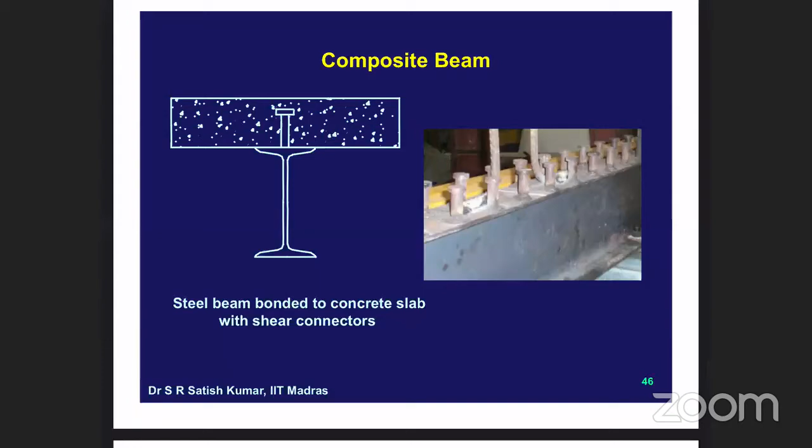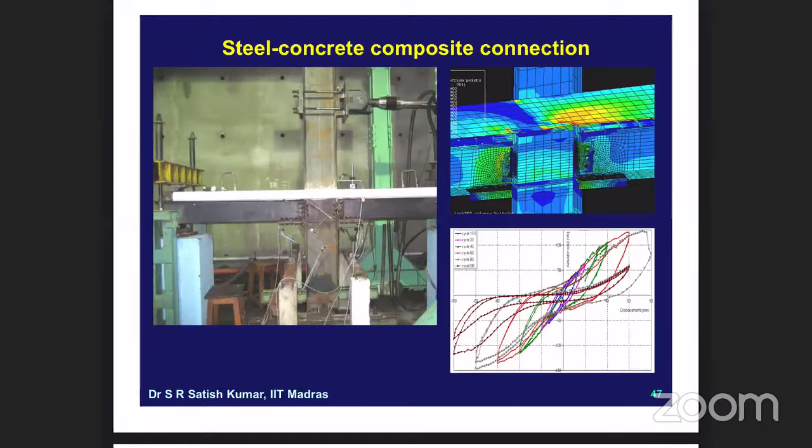And such beams, when they are connected to columns, we get what are called a composite connection, right? The composite beam to, it could be a pure steel column, it could be a concrete filled tube column, or it could be a concrete encased column, whatever it is. So such a construction has several advantages in terms of high speed and low cost, etc. And such connections have been studied, and they have been found to perform adequately under seismic or lateral cyclic loads.

Then there is another class of structures which are called cold-formed steel structures. These structures are characterized by high B/T ratios of the sections. So they are liable to what we call local buckling and other types of buckling also, flexural buckling, flexural torsional buckling, etc. But if you can suppress some of those modes, as in this case we have a hollow box section where torsion, etc., is not an issue, the only issue here is a local buckling possibility.

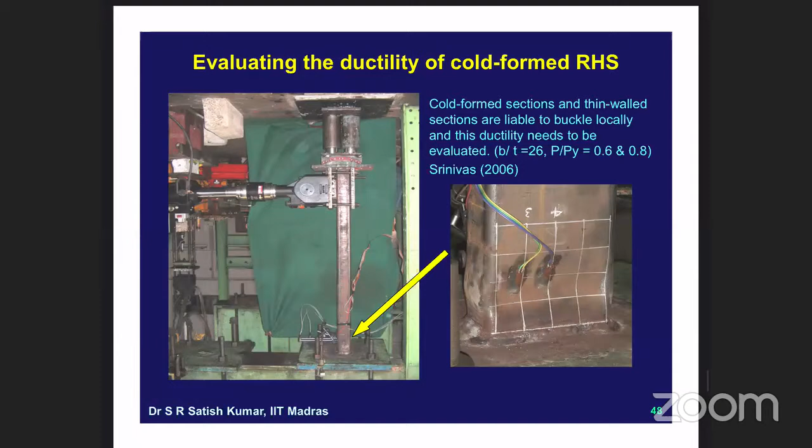The interesting thing to note is that the ends have been strengthened a lot by stiffeners and all. So many people are under the impression that you can just weld a hollow rectangular tube to another column and you'll get a very rigid connection, etc. Not like that. Because the column sections will, the flanges will go inwards or buckle outwards, or the welds may crack. So they do require elaborate strengthening arrangements. So don't just weld a hollow tube to another tube and assume that it will act as a rigid connection.

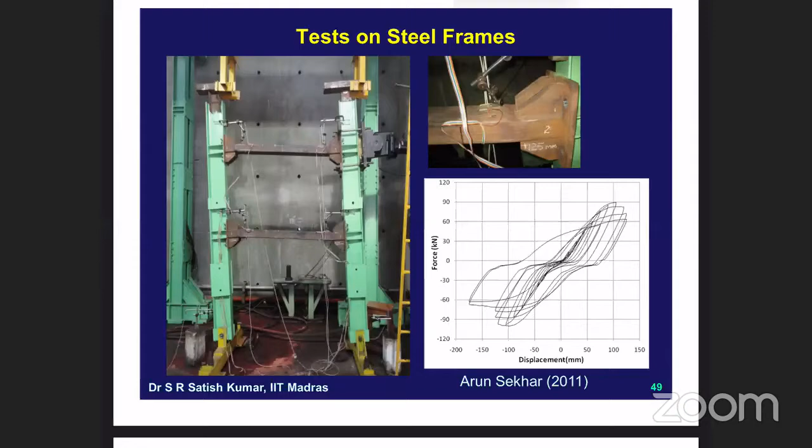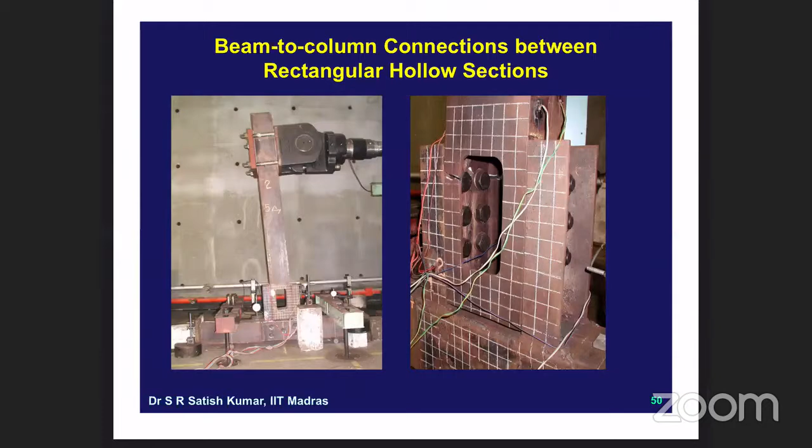So there are detailing rules for transferring static loads and cyclic loads. So those things have to be followed. And one possibility is to open up the beam with an opening in the web, so that it enables the use of conventional bolts, and thereby it reduces the cost. And the thing behaves similar to another system which is called a reduced beam section.

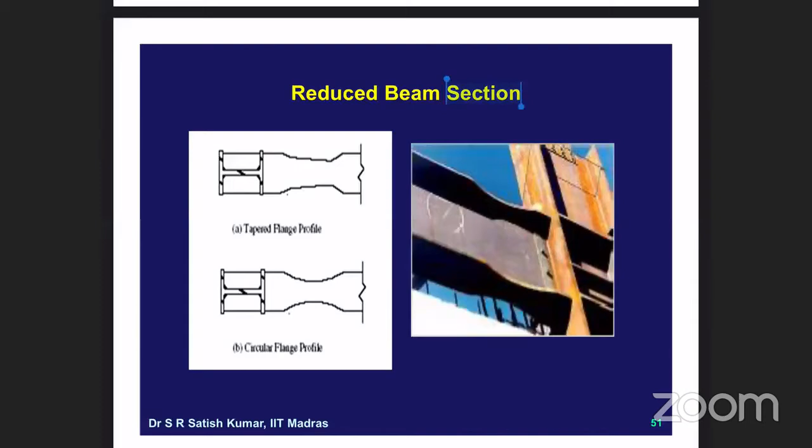So what happened after the Northridge earthquake was, people realized that if you weld the beam directly to a column, even though you are providing column web stiffeners, etc., there is cracking at the beam column weld. Okay, so even though you do a very good weld and you have a safety margin, what they found, as another way of making sure that the beam will develop a plastic hinge away from the column face, is to weaken the beam slightly by cutting the flanges or reducing the beam section. So this is called an RBS section, and these have also been studied and their performance has also been documented. So this previous one of opening in a web and then drilling bolt holes in the flanges also behaves like an RBS section.

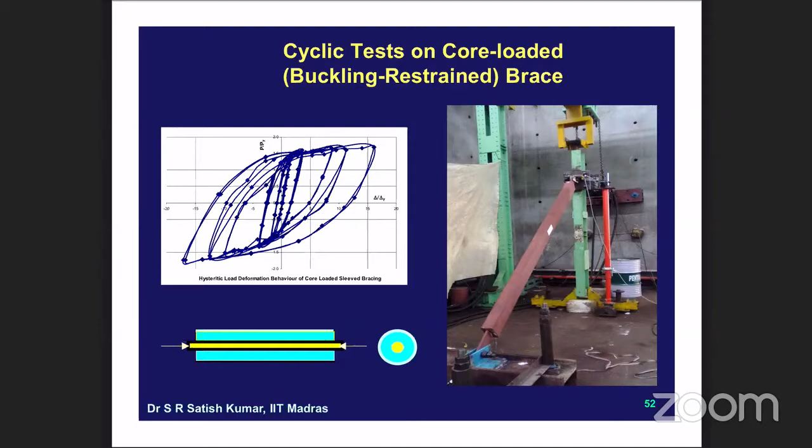Only thing is, we need to be very careful with the end zones of the connections. That is, the connection parts may buckle or break. So if they are properly designed and they are not having any serious problem, this brace is able to dissipate a large amount of energy, and such braces are known as buckling restrained braces. And frames where the conventional braces have been replaced by these are buckling restrained brace frames.

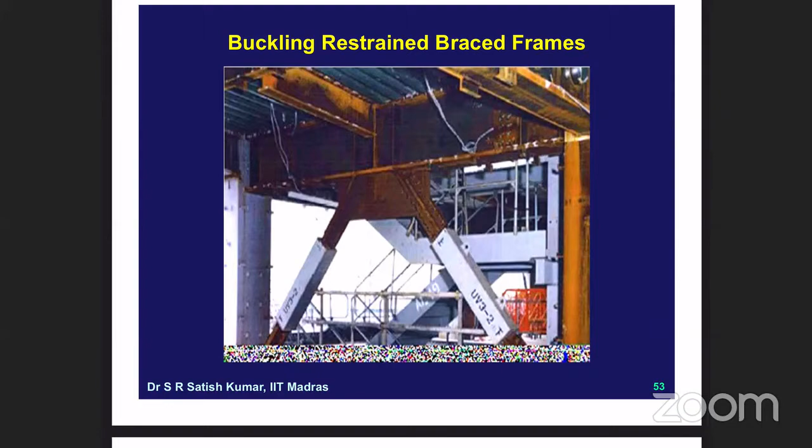Okay, so this shows an example of a BRBF, as it is called in short. It's an inverted V braced BRBF. So this frame will also perform well. Okay. Then coming to another system, as I told you, these steel plates, even if they buckle in a certain way, they do manage to dissipate considerable energy. They are buckling in shear in this case.

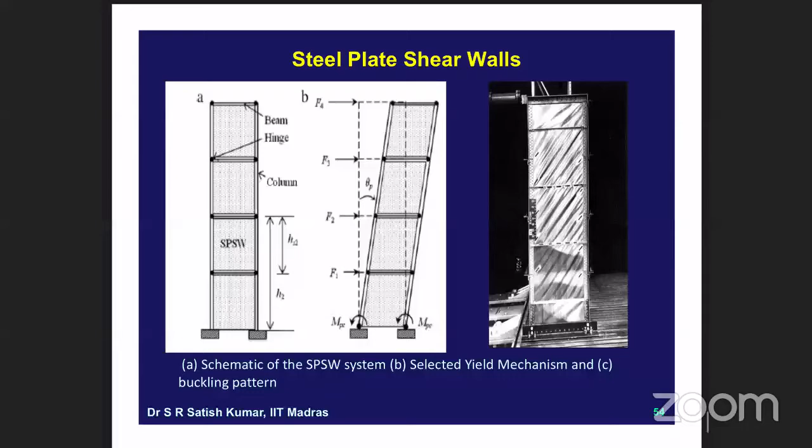So steel plate shear walls have become very common, well-researched components, and guidelines are available in codes like the American Institute of Steel Construction Code on how to design such systems. These are called SPSW in short, and these are also very commonly used nowadays. And of course, we have the conventional base isolation and active and passive vibration control systems, which are also possible.

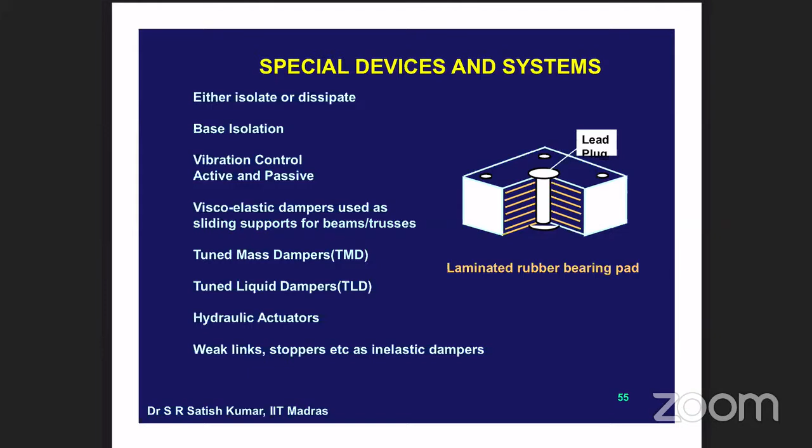These are generally more feasible for steel structures because steel structures, as I said, have lighter mass. So they become easier to install for steel structures than in reinforced concrete structures, and they are also used quite widely along with other energy dissipating systems to ensure adequate performance under severe earthquakes. So with that, I conclude my talk. I've given you an overview of how a variety of steel systems can dissipate energy and perform.

Only thing is, we have to be careful that they don't have brittle failure modes like local buckling, global buckling, or connection failure modes like block shear failure, etc., or gusset buckling. Those are possible modes which could hamper the performance. So if you can avoid such failure modes, then you can get a very good steel structure with the normal design without having any extra cost.